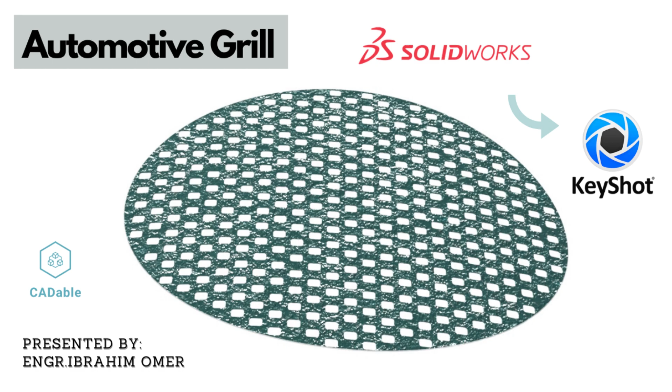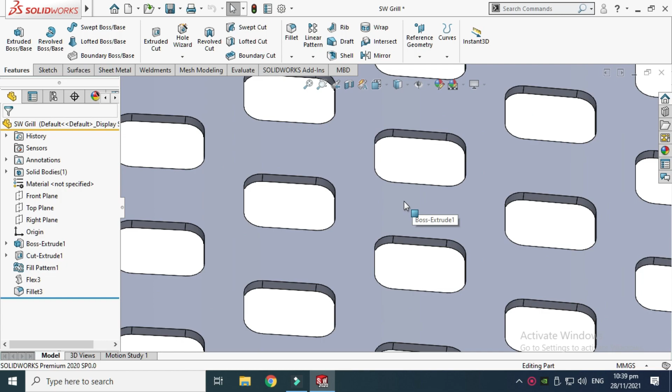This is Engineer Ibrahim Omer, and today I'll show you how to make this grill in SolidWorks. First of all, I'll show you how I modeled this in SolidWorks, and then I'll export this model to Keyshot using the Keyshot add-in for some basic rendering.

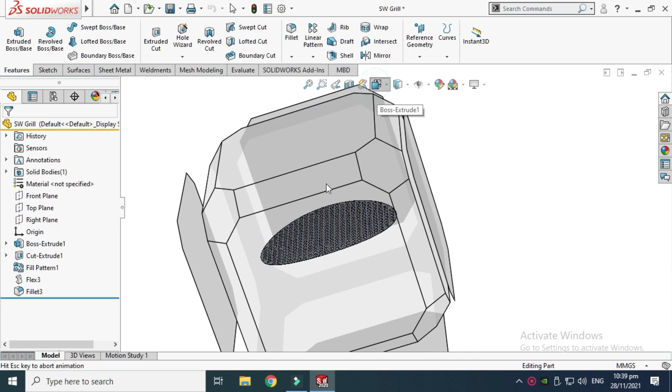So here is my 3D model, and as you can see, it has a bend. If I show you from a top view, this is the grill, and you can see from this side view that little bend. Basically I have used the flex command, and I'll show you how I modeled this.

So just drag back. This is my SolidWorks design tree, and as you can see, all these are 3D commands, and under these you can find the 2D sketches or 2D layouts. Let's drag back up to here. First of all I have used this extrude boss command, and this is a very simple sketch.

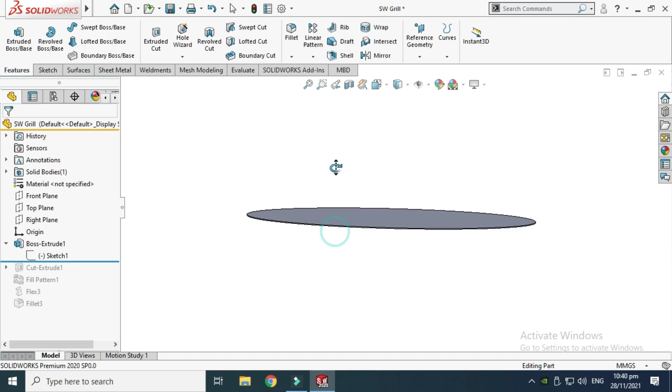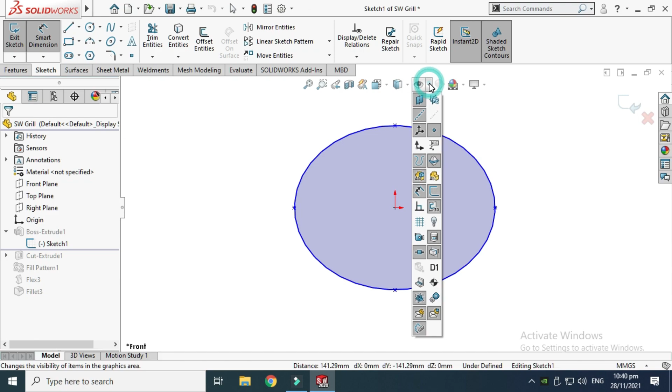If I go to edit sketch, this is a simple ellipse, and as you can see it is still underdefined. You can make it fully defined, but I think it's up to you. You can also go here and find that I can still constrain this sketch, and let's say I can fix this. Okay, so this is the sketch.

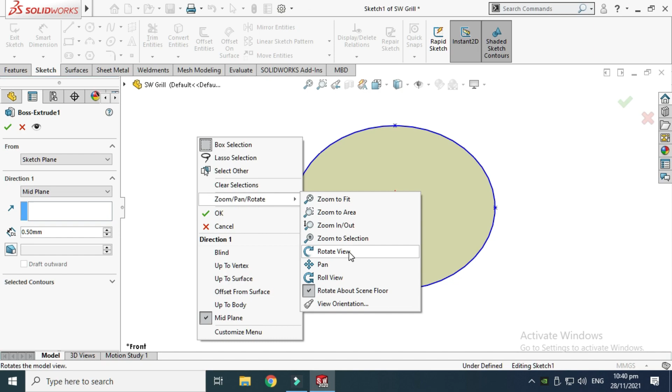Let's go to this command, boss extrude. I have applied 0.5 millimeter thickness from the mid plane. As you can see, this is the thickness, 0.5 millimeter both sides, right?

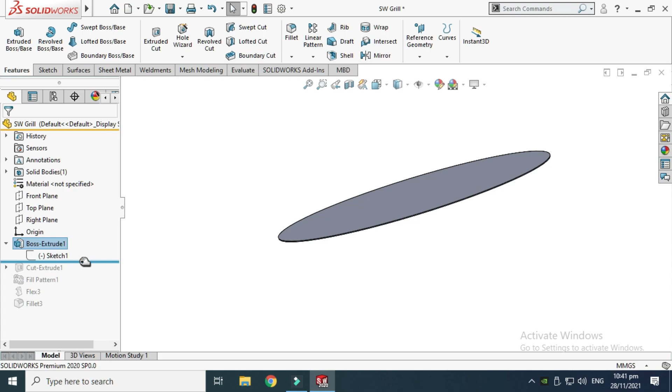After making this extrude boss, I have used a command called extrude cut. You can find these commands in this tab, features. Here is extrude boss, and here is extrude cut. Let's drag back. Okay, so this is a very simple rectangle or square. In fact, let's check it. It's a 2D sketch.

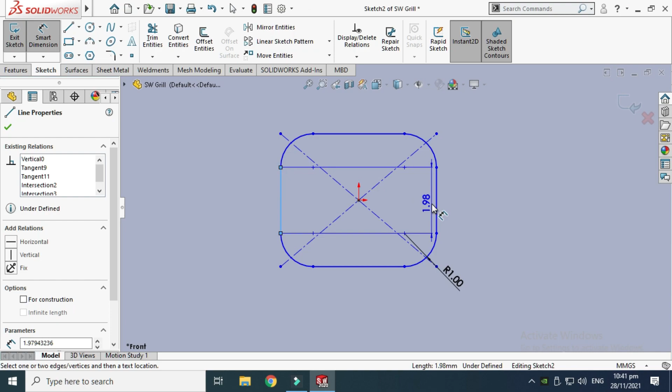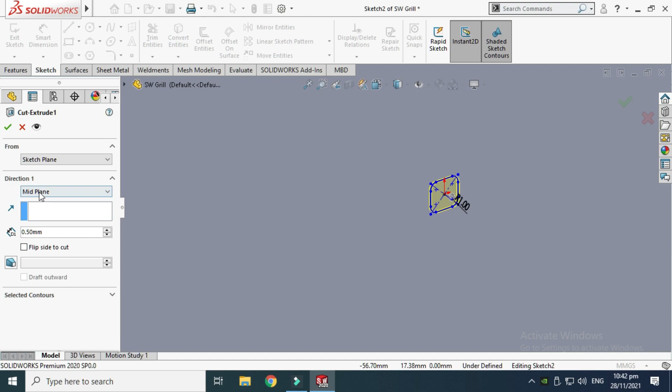Let's go to cut extrude. You can use the option through all both sides, but I have used 0.5, which will work because the thickness was 0.5 both sides, so I have used cut extrude 0.5 millimeter both sides, right?

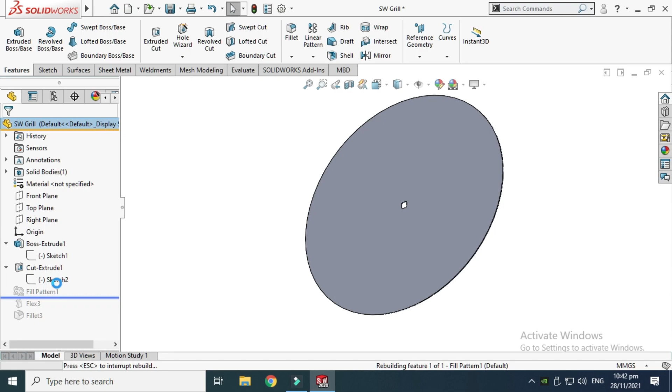After creating this, I have used a command called fill pattern, which will apply this cut extrude to all this geometry. If I drag back to features, you can find this command here under linear pattern, with different kinds of pattern: linear pattern, circular pattern, curve driven pattern, sketch driven pattern, table driven pattern, and fill pattern, right?

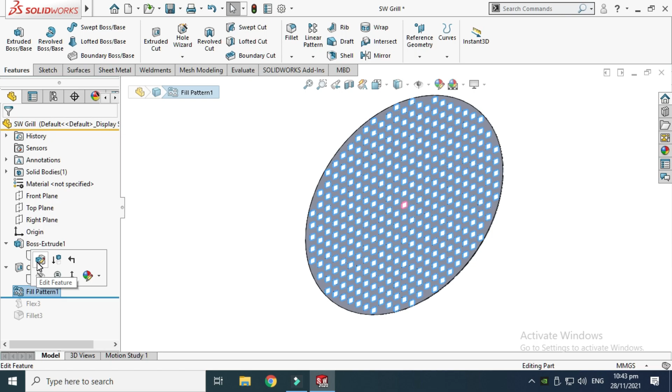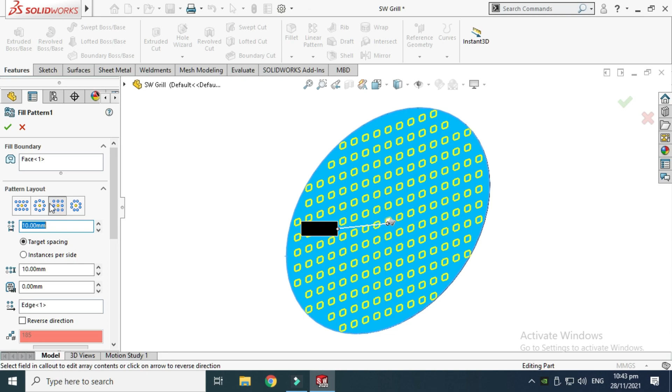Okay, so let's check it out. Let's go to fill pattern, edit feature, and here you can see this was my base geometry or base sketch, and here you can see different pattern layouts. This is the polygon pattern layout, this is the square pattern layout, this is circular, and this is perforation, right?

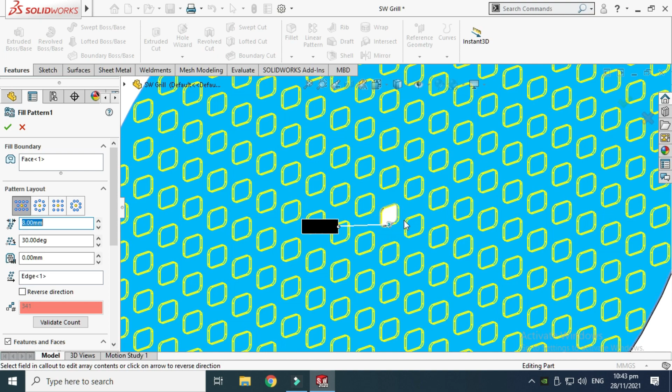You can change the spacing, you can change the angle, and this is the edge where it is locating this pattern, right? So after creating this, you can see that I have used this cut extrude feature, and it has applied this cut extrude feature to all this geometry, right?

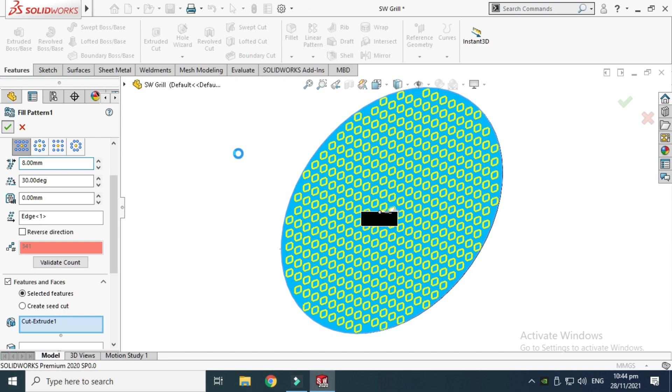I have used a fill pattern command. You can use different patterns as well, like circular pattern or square pattern, but I will use a perforation pattern here, right? So click OK, and OK. You can see that it is still a straight grill or a straight extrude boss plate.

And then I have applied the flex command, right? The bend, and you can see the bend angle, which is I think 21 degrees. Let's go to the flex command here, edit feature, and here you can see that it is calculating the bend angle for each side.

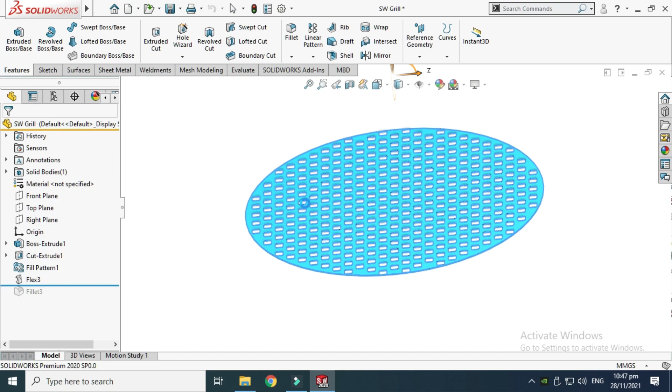If I show you from this view, this blue line is the straight plate, right? And this orange color preview is the bend angle. The bend angle is 21 degrees, and the radius is almost 513 millimeters, and you can see these parameters. We can also use twisting, tapering or stretching.

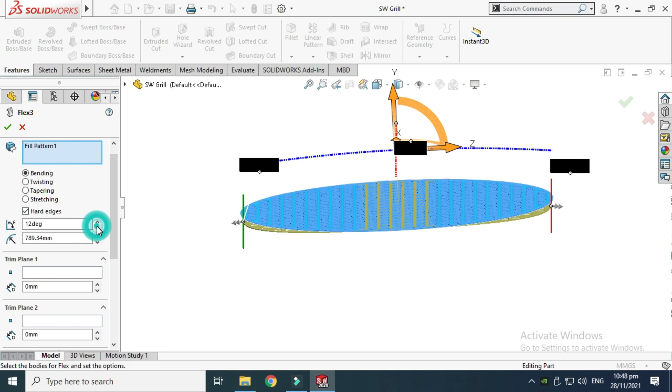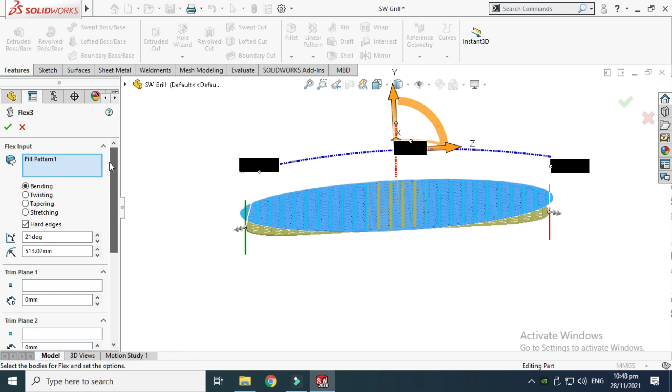Here I am using bending, and I can change this angle. Let's say I can change it to 12 degrees, or go to 21 degrees again, right? You can use hard edges, or uncheck this box. You can use flex accuracy, moderate, low or high. So this is the bend angle, and you can use twisting or tapering if you want.

So I have used a simple plate, and then I have applied this flex command, and under flex command I am using bending with 21 degrees and this radius, right? Here I am cancelling this. Okay.

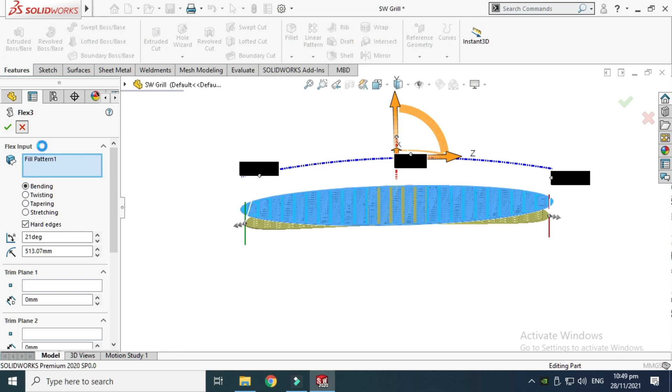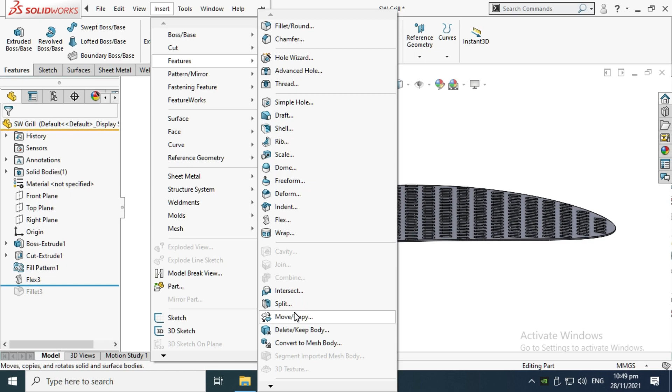Lastly, I have used a command called flex. Let's say if I want to see this flex command, which does not appear here, so I'll go to insert, I'll go to features. These are all 3D features, and I can find this command here, flex command, right? You can find many commands like dome, freeform, indent, wrap, intersect, split, move, copy, etc., which you cannot find here.

You can customize your commands, but usually this command does not appear here, right? So lastly, I have used a command called flex. These are the reflections which you can turn on and off from here. Lastly, I have used a command called fillet, which is a very common command, and you can find the fillet command here.

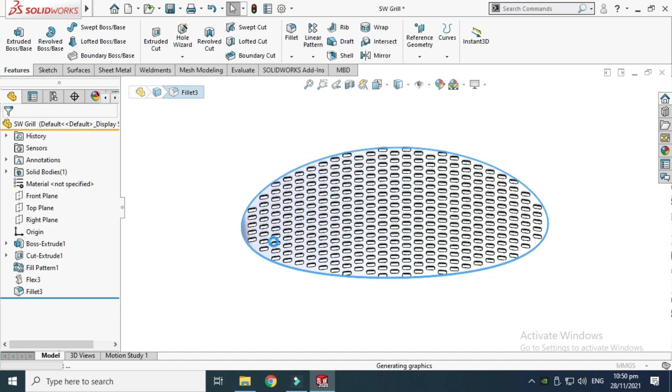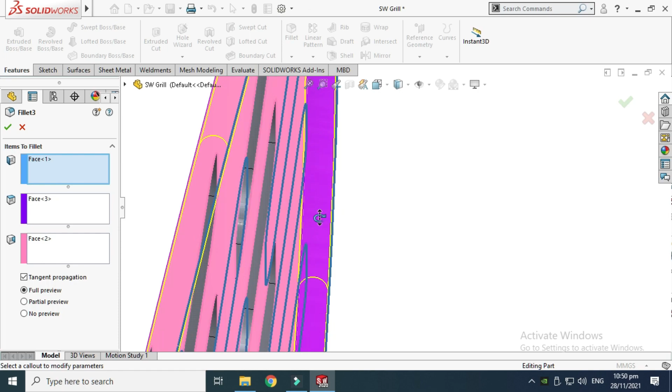So let's go to edit feature, and let's see what is inside this fillet feature. It is calculating. So I have used this type of fillet. We have 4 kinds of fillet in SolidWorks, and basically it is taking 3 faces to make a fillet. One face is this top side, one face is this side, and one face is the back side, right? 3 faces to make a round fillet.

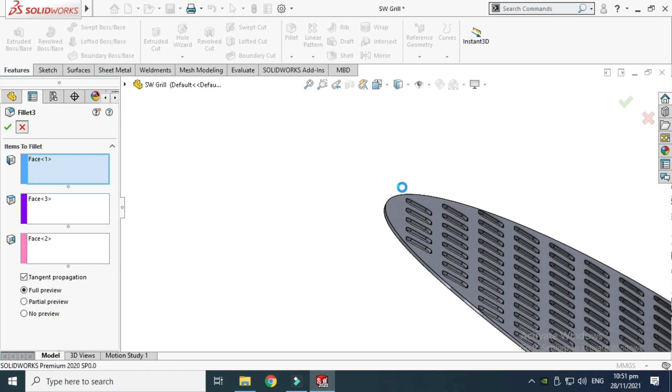Okay, and you can see from the preview, this pink preview, this purple preview, and this blue preview, it is taking 3 faces to make a fillet, right, on the outside edges. So let's cancel this, and so we are done with this 3D model by using this feature tree.

And let's say I can apply some material, go to appearance, and let's drag this to here, go to appearance, and let's say I can apply some glass material. You can apply different material. You can apply any material you want. Let's say painted material.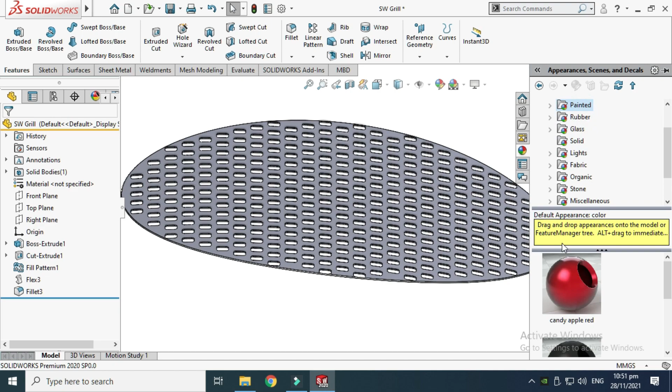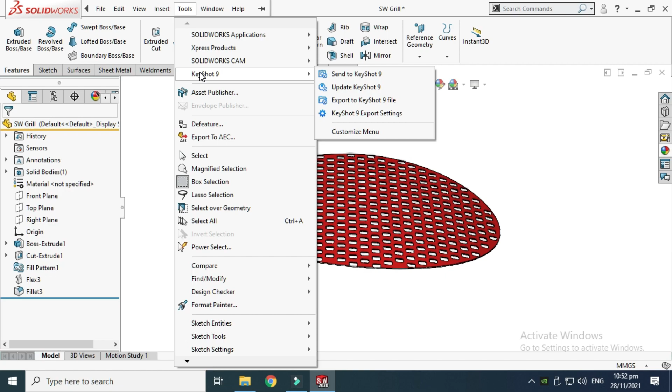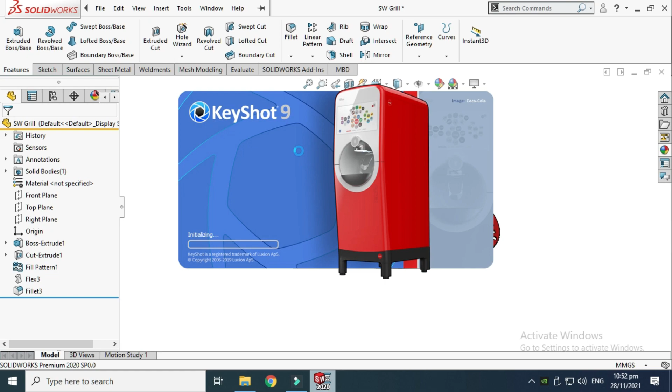Okay. So next, I'll export this model to KeyShot 9 for some basic rendering. So here I will be using the KeyShot add-in. So let's select this, send to KeyShot 9, and here we'll be applying some basic material, some basic texture or color, and some basic render settings. Here KeyShot is opening. I am using KeyShot 9 and SolidWorks 2020.

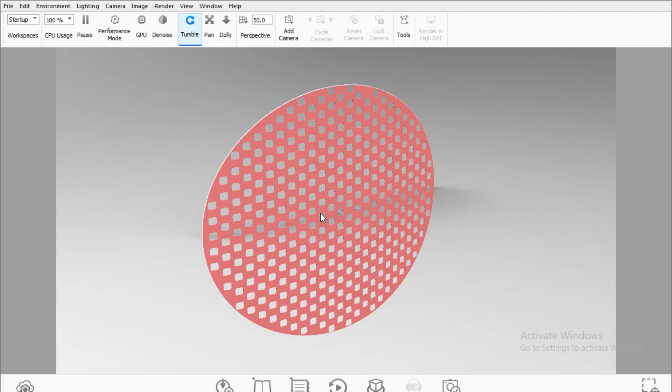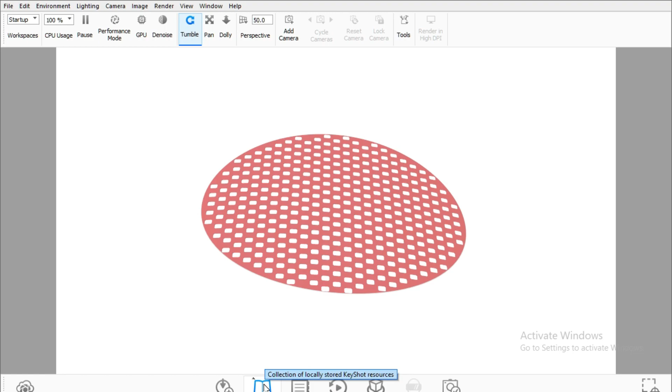Okay, just cancel this, and just cancel this from here. It is importing SolidWorks grill. Okay, so let's go to environment, and let's go to background and select white background. Okay, so here is the material, and you can apply any material you want.

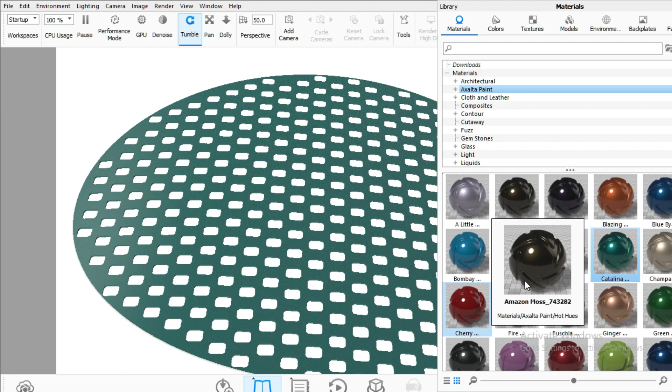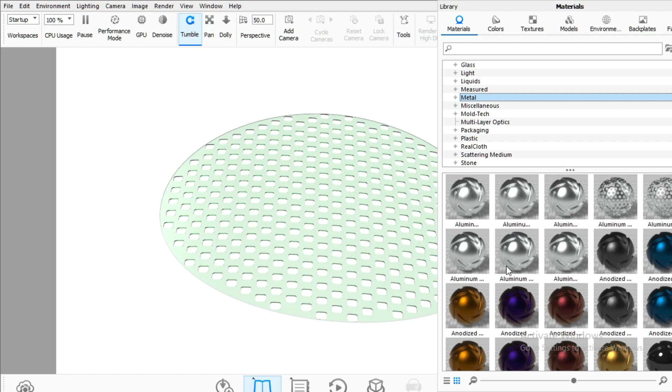Let's go to this paint, and let's say I can see this, and let's say I can apply this. You can apply any material you want. Let's say I can apply this, let's apply some metallic texture. So let's go to metal, and let's say I can apply this.

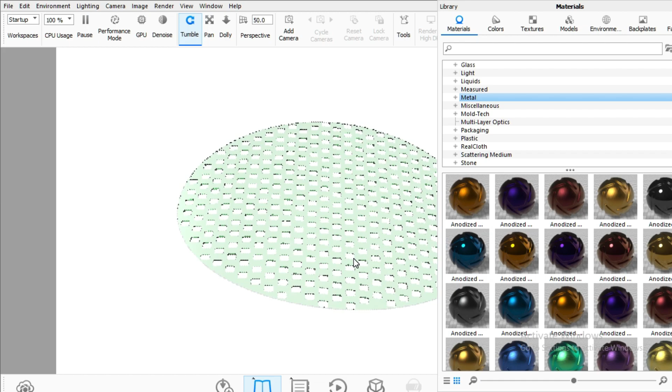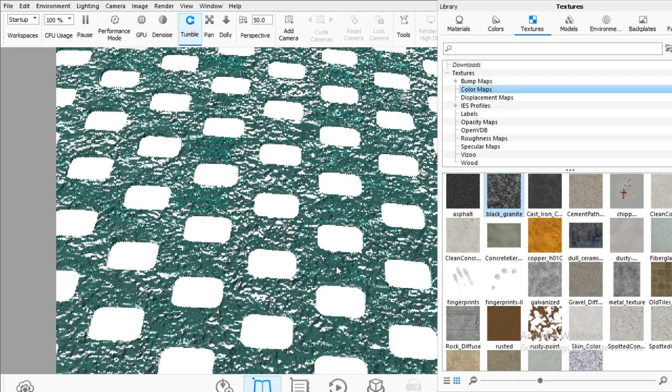Okay, so here it is up to you. So let's press Ctrl Z, and I think it is fine for this basic render. We can apply some colors, some textures, and let's say I can apply this texture. Right, you can apply any texture you want. Okay, I think it's fine for this rendering.

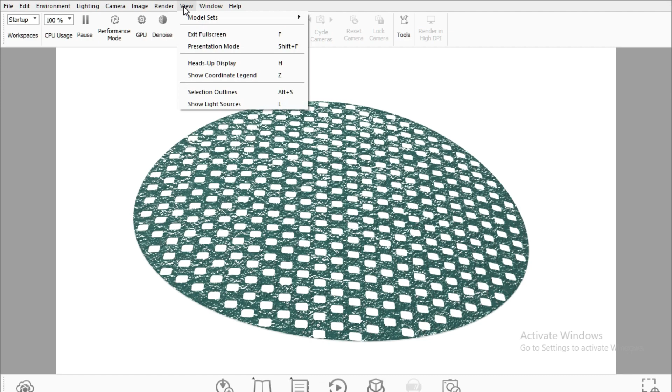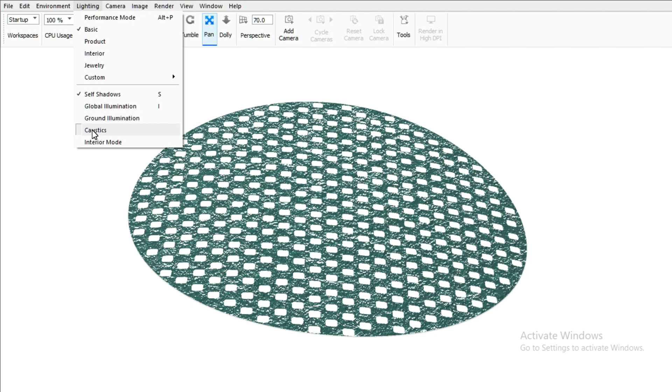You can customize your environments. You can customize your background or back plates. Let's cancel this, and let's go to view, and let's exit full screen. Let's go to image, and go to landscape and change this to 1280 by 720, and center my model. Okay, and let's change this to, let's say, somewhat here. Okay, lighting, let's check this box.

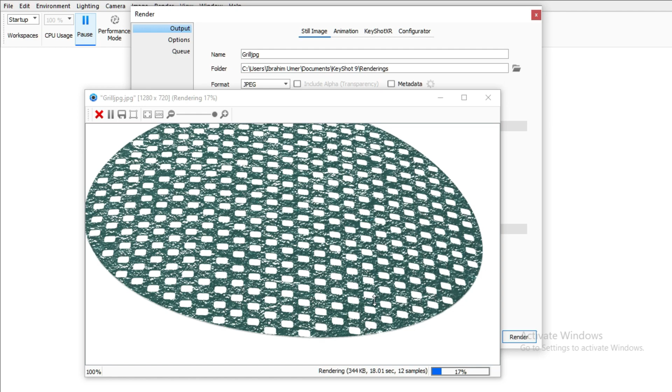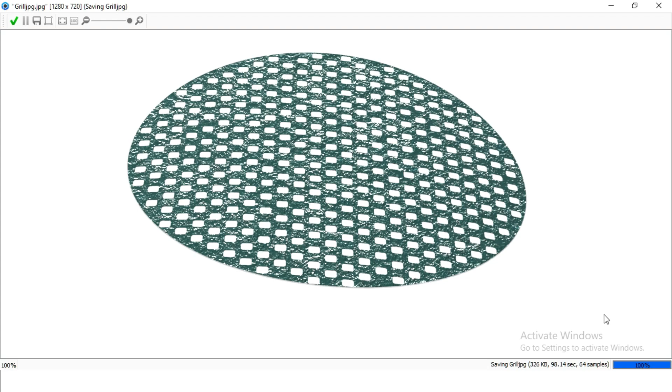and it will calculate my rendering. Here are the samples, and here is the rendering time with its size. So we are almost done with this rendering, and here you can see the rendering time and rendering sample 64. So this is my final render. Let's check this box, close.

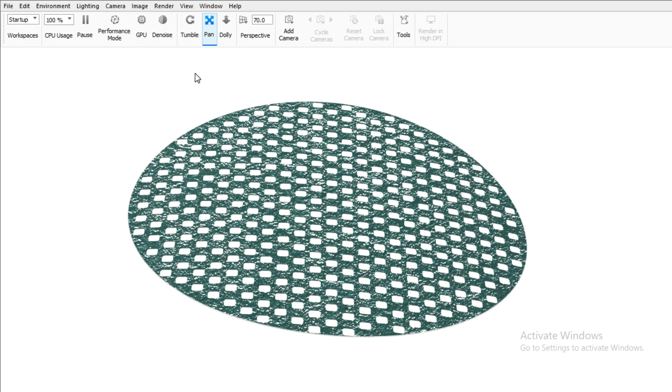Let's close this again. And so this is the basic tutorial of how to make a grill in SolidWorks. Here I have used the flex command and fill pattern with extrude boss, extrude cut, and fillet command. I've also used basic appearance in SolidWorks, and then I exported my model to KeyShot 9 for some basic rendering. So that's it for today's tutorial.